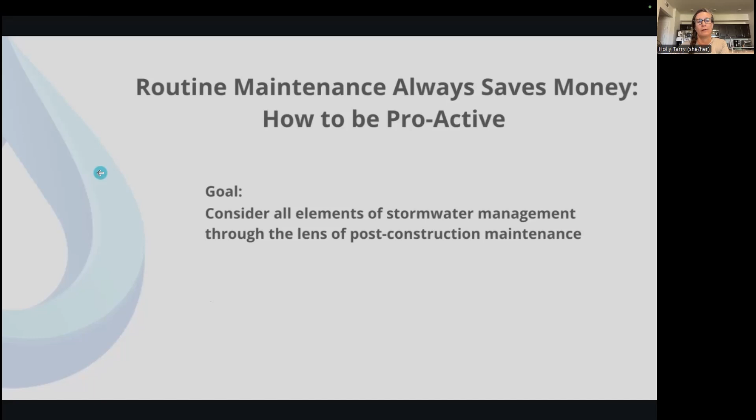I don't know why it's going backwards instead of forwards. There we go. Throughout the presentation, the agenda will be at the bottom as a progress bar. And we'll start with our condition score criteria as a way of framing the whole conversation and speaking the same language.

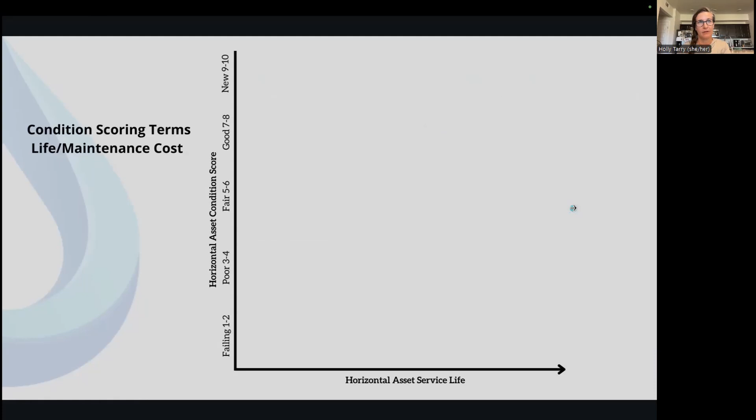Horizontal assets like pavements, ponds, and pipes that serve a property can be assigned a condition score at any point in its lifespan, and each asset has a service life. And left alone, each asset's condition will degrade over time. When the asset is new, the operator can make a decision to invest in routine inspection and maintenance as the most cost-effective way to keep assets functional and compliant. These systems have water quality functions, and municipal enforcers will be by at some point to inspect them.

Over time, the asset condition bumps over a threshold where it cannot be made functional and compliant with routine maintenance and needs more complex, more expensive restorative maintenance. You can delay the need for restoration with routine maintenance. And then failing to make restorative repairs or failing to make them in time bumps the asset condition over a threshold where it can't be restored and needs to be reconstructed to function. And this costs up to 10 times more than maintaining the asset.

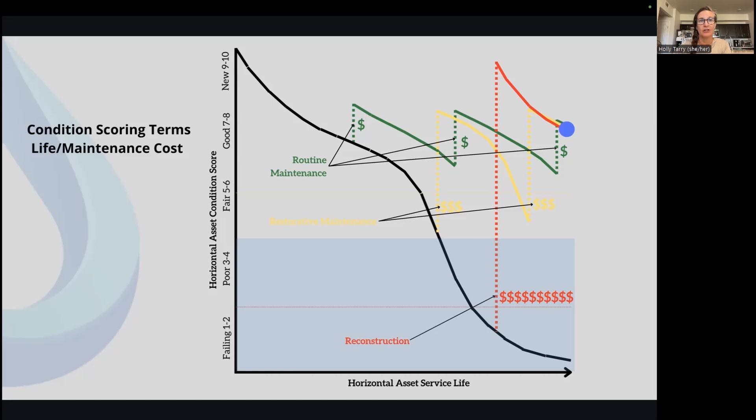And it puts you right back at a new opportunity to maintain it routinely, or try again to dodge municipal enforcers and let it fail and rebuild. And then, of course, these poor conditions degrade the user experience, lower the property value, and just keep putting Class A property standards farther and farther out of reach.

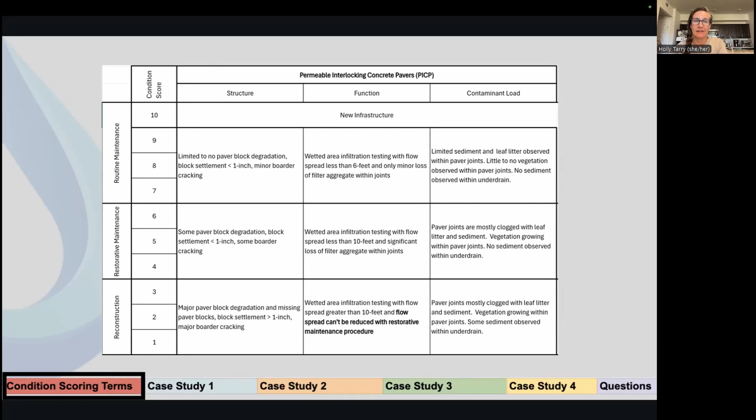I know you can't read this, but we'll talk about how you can get your hands on it. Our engineer has developed condition score criteria for various types of SCMs, structure, function, and contaminant load, to frame the maintenance needs of the assets. The condition score criteria is actually something we love to share and get feedback on. It always makes for interesting conversation about different ways that people are organizing this complicated information. So please reach out if you want to see the whole thing. We have criteria for PICPs, EDBs, bioretention, storm sewer, and underground SCM.

The condition scores overlap with our framing of maintenance costs. So we can speak to the operator's concern, which is cost, but also the enforcer's concern, which is structure, function, and contaminant load of the SCM. And we talk about the levels of service consistently to reduce confusion.

Routine maintenance when the asset is newer or restored and in good condition and compliant with municipal code and least expensive to maintain. Restorative maintenance when the asset is not compliant with municipal code and needs more extensive, more expensive service to bring it into compliance. And reconstruction when restoration can't bring the asset into compliance and you'd just be throwing your money away to keep trying.

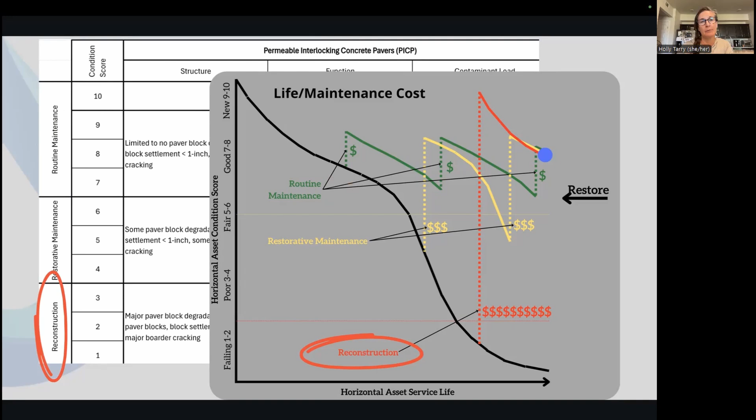So for this first case study, we're looking at permeable interlocking concrete pavers and comparing two client profiles. Here's the timeline. Both are notified by municipal enforcers that their pavers are non-compliant. They both get restoration service. We'll talk about what that entails.

Client A pavers are then compliant and they have a chance to get on a routine maintenance schedule and stay compliant. But client B pavers still fail the infiltration test, which we'll talk about too, and need to be reconstructed. They're too far gone.

So client A initially failed the test and was not compliant, but was not far off. The pavers weren't in horrible condition. They were more newly in need of restoration. And after restoration, the asset was in great shape, passed the test easily, and can be kept compliant with the least expensive service, routine maintenance.

Client B, on the other hand, failed the test badly. The pavers were in bad shape from years of deferred maintenance. The client had to try restoration, and it did improve the condition, but that 5-figure expense ended up being a waste for them because we couldn't bring the pavers back, and we'll dig into why.

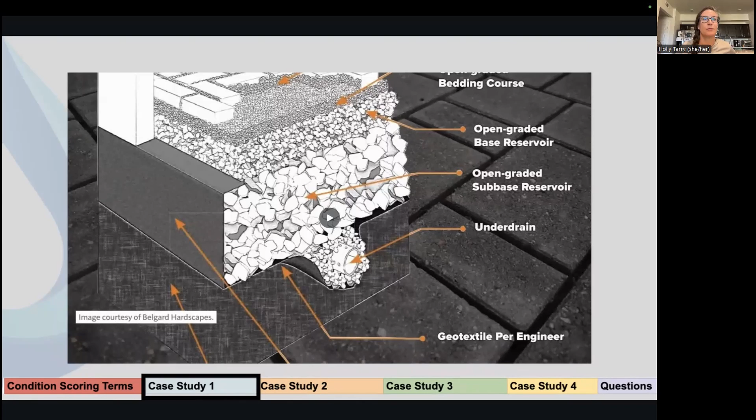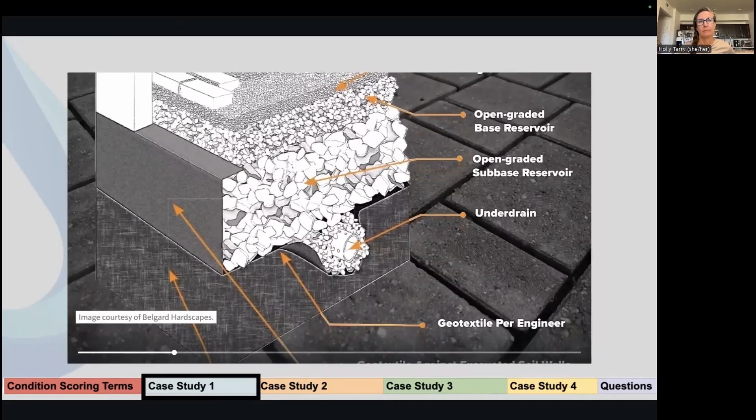To understand the levels of maintenance, let's look at the paver system itself and the gallon pour test, which informs the condition score. Permeable paving allows water to pass through into the gravel layers. It uses unique products with grids or patterns filled with gravel or grass. These robust and durable products can withstand heavy loads and traffic while also maintaining permeability.

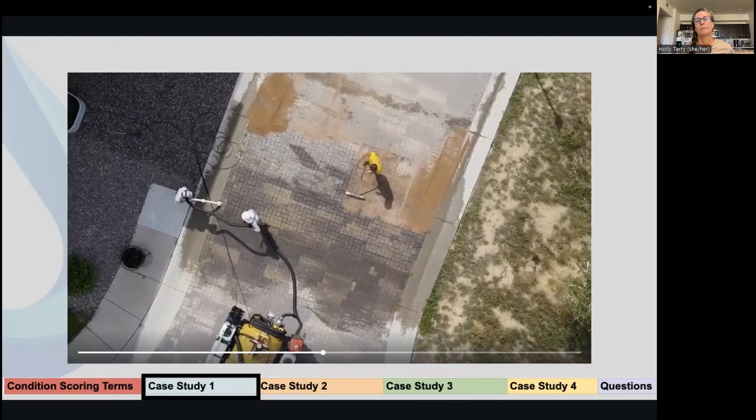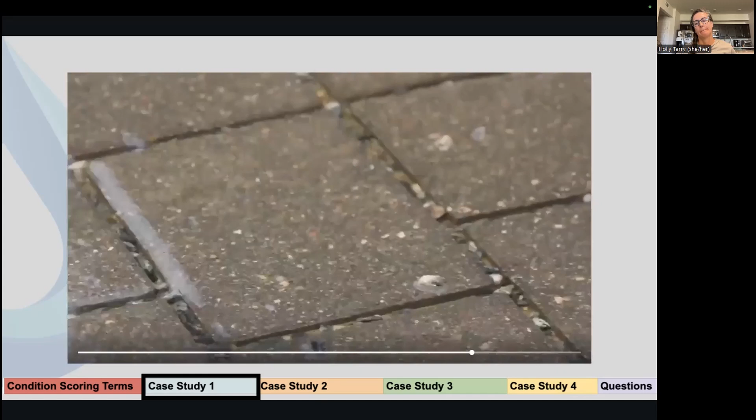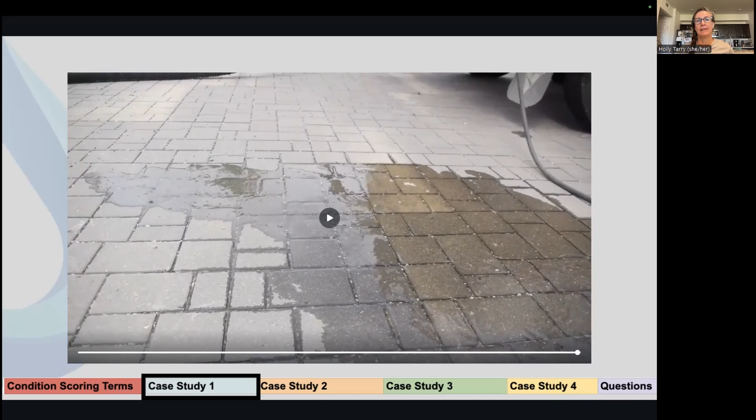A simple test for the functionality of the paver system is to pour a gallon of water over the surface at an even rate. The distance the gallon of water travels directly reflects how well the paver system is capturing water as opposed to letting the water run off. The infiltration test is from the Colorado Stormwater Center Permanent Water Quality BMP Inspection and Maintenance Field Guide.

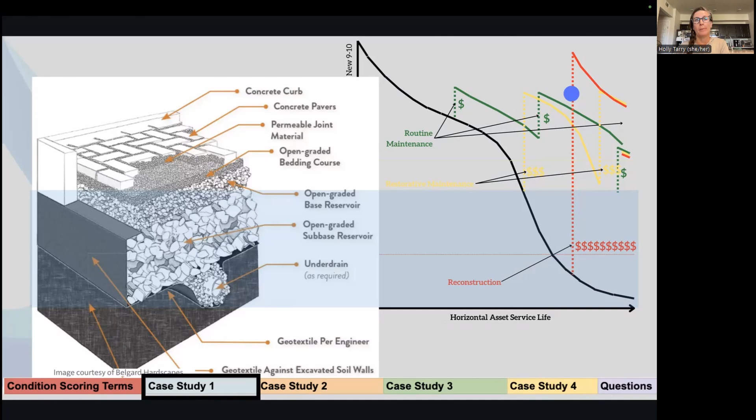Now, all of the maintenance that we can really do is at the top brick layer. We can remove materials off the top of the joint rock between the bricks, which is routine maintenance, or we can completely remove the joint material by vacuum removal and replace it with clean rock. Everything below that, in cases where the sediment and grime has worked its way through lack of maintenance down into layers below the brick, is a reconstruction situation. Once you're pulling up brick, you're in the very expensive reconstruction zone.

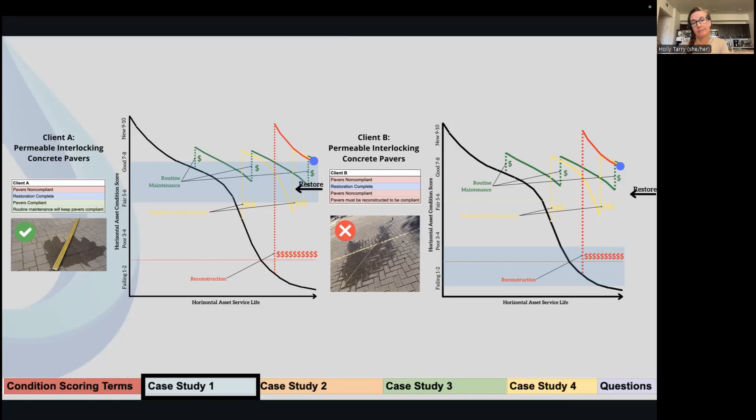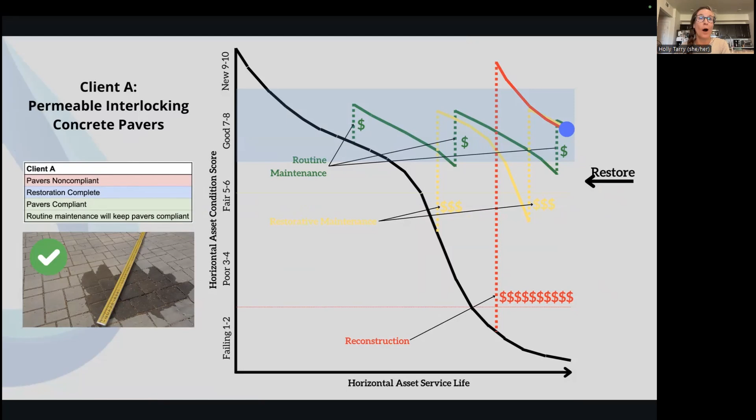So the very different outcomes in the two cases were due to the starting condition and the amount of time the asset was in use without maintenance. With the better beginning condition score, we could do the restoration and improve the condition into a zone where all that was needed to keep it going for a while is routine maintenance. And this is what that looks like. Lawn and litter vacuum with 1700 CFM suction.

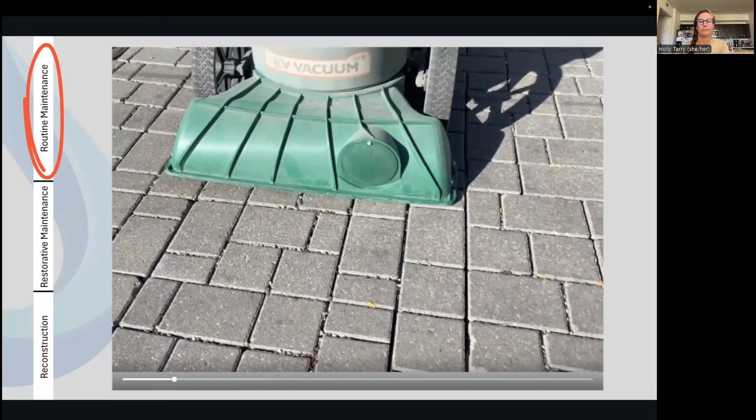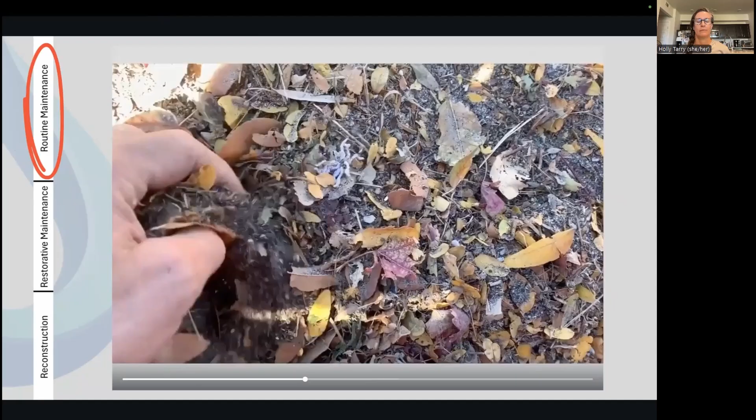This removes grime and debris off the top of the rocks without removing the rocks themselves. Removing sand, dirt, leaf litter and the grime that sticks to it allows the system to function properly for longer. Clean joints mean grime is not working its way deeper into the system. How often this type of maintenance is needed is site dependent. We recommend starting with twice per year and adjusting based on inspection results.

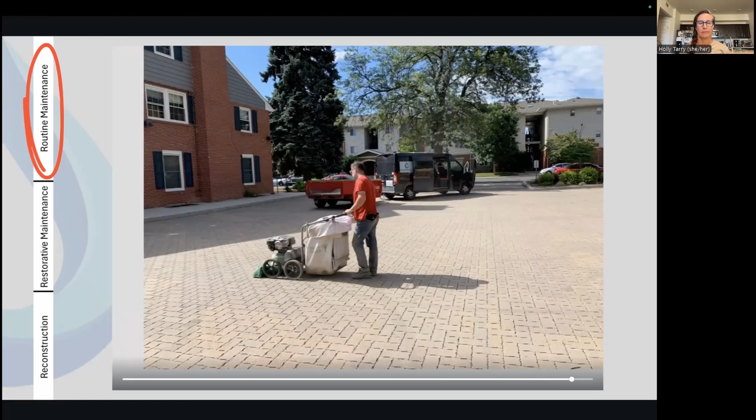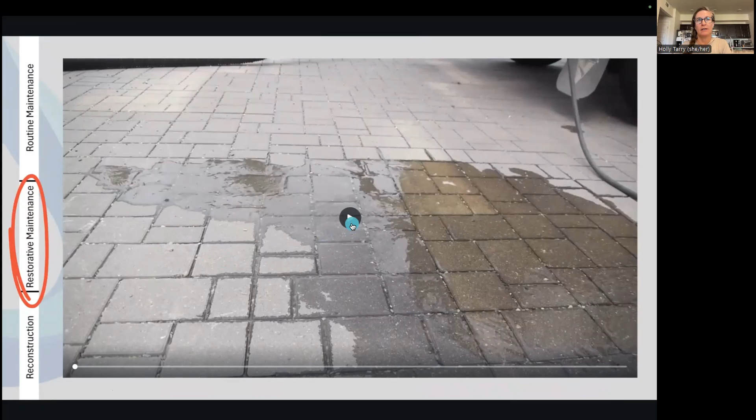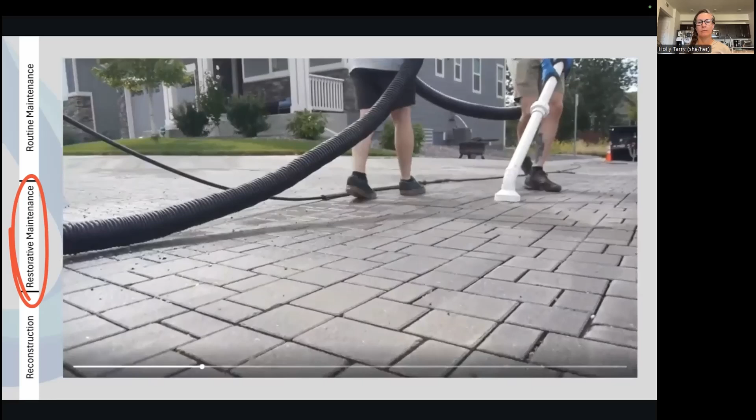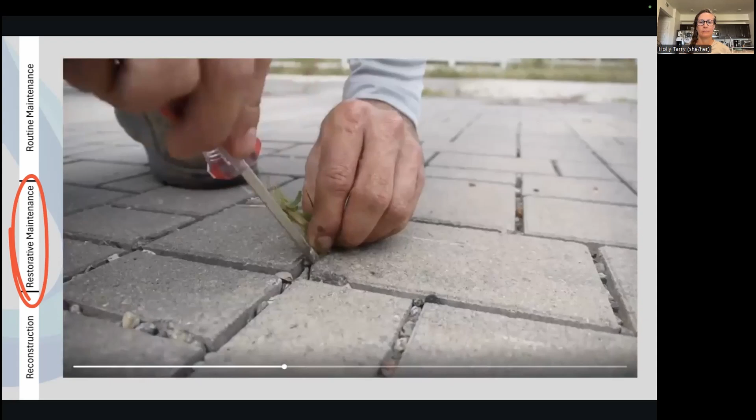Now let's look at what restoration when the asset is not compliant looks like. In the Cabot Court case, the water was running 12 feet downslope before maintenance had begun. To update the paver system, first SRS removed all the old gravel using a high-powered vacuum system. Water is used to break up the sediment to allow the soiled aggregate to be removed with the vacuum. Any small weeds or grass are also removed to allow fresh gravel to be inserted.

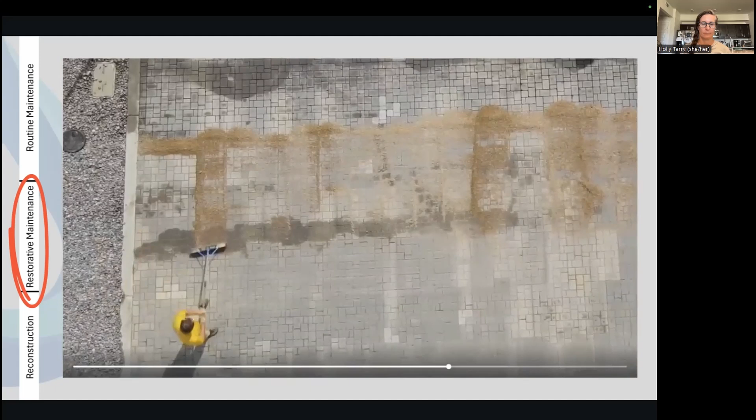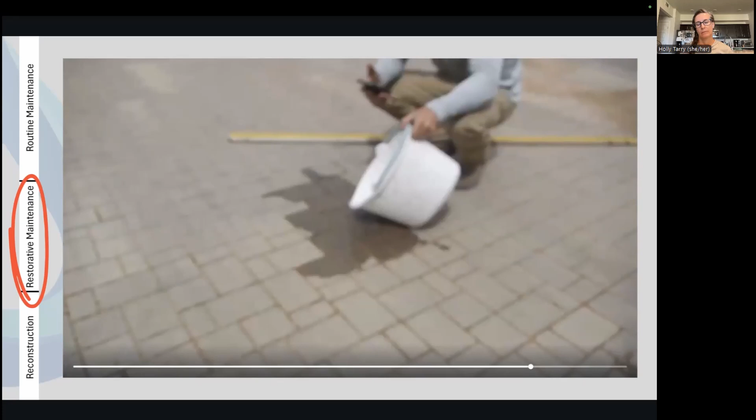Finally, the paver blocks are refreshed with new gravel, specifically washed number 89 aggregate. The new gravel is carefully swept into all the gaps between the paver blocks at an even and consistent fill. Once maintenance is complete, the permeable pavers are tested again to check how far the water spreads. After maintenance, the paver system at Cabot Court had improved to a spread measurement of less than 2 feet, an 84% improvement in function compared to before maintenance was done.

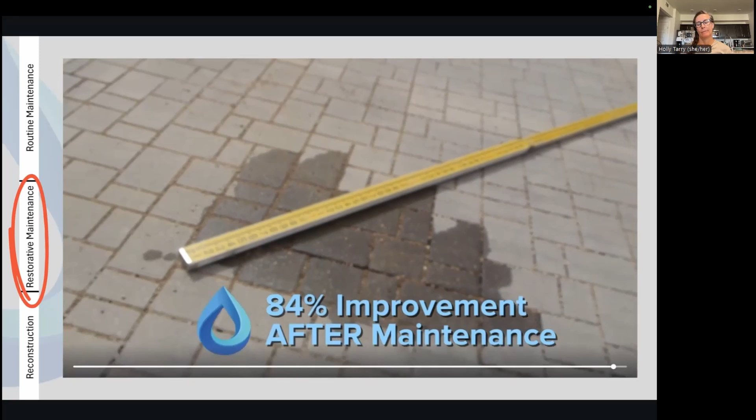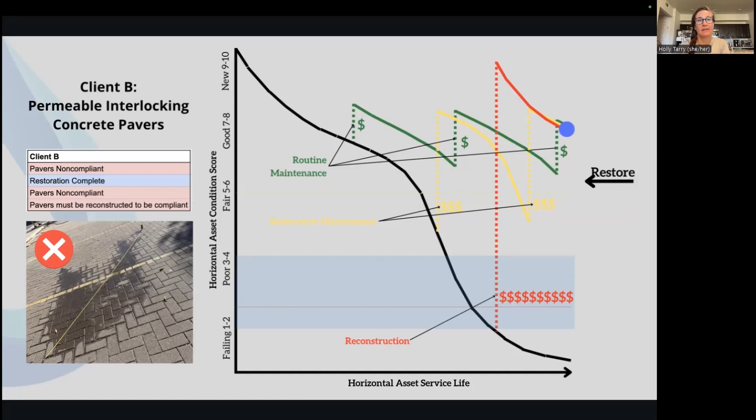So in the client B scenario, after they had attempted to restore, which improved the condition but nowhere near enough to bring it into compliance, they're left with no choice but to reconstruct the pavers. This kind of too-late-to-do-anything zone is where the real expense comes in.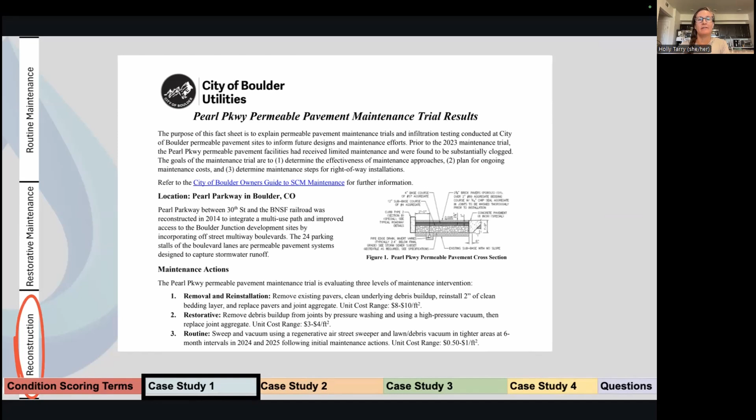The city of Boulder, Colorado has researched maintenance outcomes and costs on their own pavers and published Pearl Parkway permeable pavement maintenance trial results, which cites routine maintenance at 50 cents to $1 per square foot, restoration at a cost of $3 to $4 per square foot, and I'll say we've seen this service below $1 a square foot, and reconstruction at $8 to $10 per square foot.

So these two paver clients are on very different timelines and putting out very different expenditures. Client A caught the need for maintenance early. The enforcer actually caught it, but the client took action to quickly restore it, and they'll be compliant and in that routine maintenance zone for potentially years before needing restoration again.

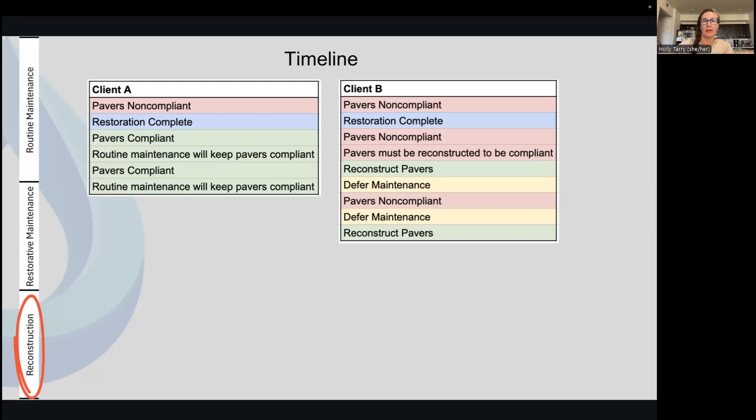While client B wasted money on the restoration attempt, although you couldn't blame them for trying, because the alternative is to rebuild, and then what? Back to deferring maintenance and dodging enforcers until the asset fails again, or starting the routine maintenance, the very expense they were trying to avoid, right after completing the big construction project of rebuilding the whole thing.

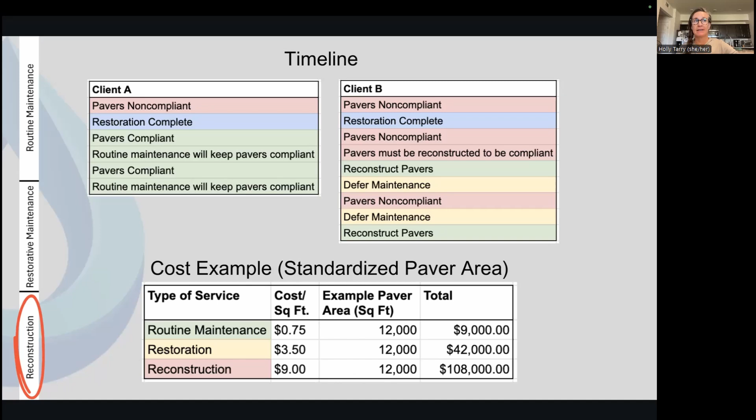And the cost of the different timelines is so different. If we use an example site, since the two real sites are different sizes, and apply Boulder's numbers, the costs of these service levels are drastically different. So that's the end of the paver case study. Next up is detention pond.

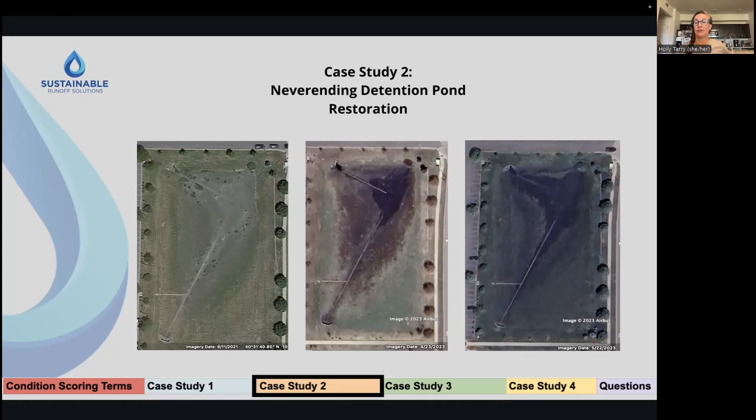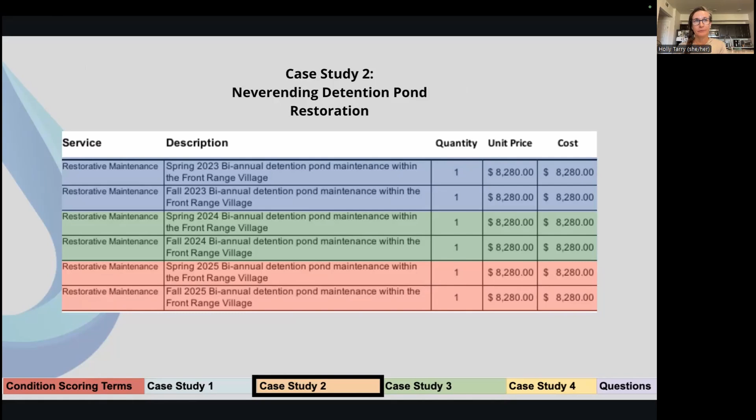Okay. So this next case study is about an extended detention basin perpetually living in that restoration zone due to it being under-designed for the conditions. The pond was needing restoration 2 times per year. They were spending nearly $17,000 a year trying to occasionally be compliant, but really were always remaining behind the 8 ball. And because the amount of material entering the pond was sometimes keeping pace with the amount we could remove during restoration, the pond was never cleared.

The best we could do within their budget was to just keep it from getting worse and let them know in the quote that it was likely that the existing sediment within the pond would resuspend each year, causing clogging issues until and if restoration was complete.

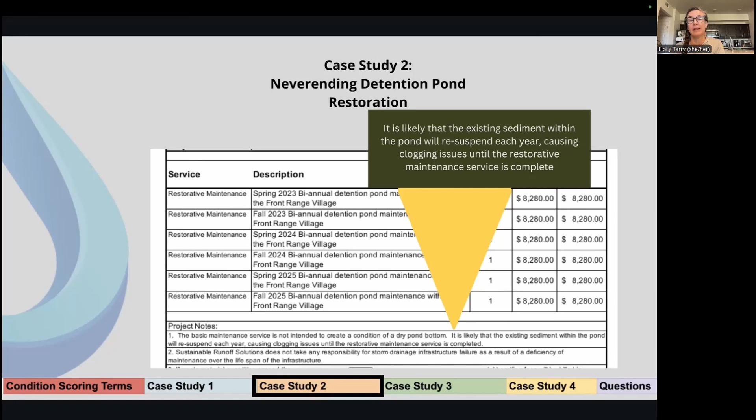Now let's look at 3 snapshots in time and how it became clear to us that at this rate, restoration would never be complete. Let's look at 3 aerials of the Ziegler Pond from Google Earth. One from June of '21, right before our first cleanout. One from April of this year after 3 cleanouts, right before our 4th. And one from just a month later, right after our 4th cleanout in a super wet year.

The sediment is drier and lighter in the first picture, but you can still see that it fills the channel all the way back to the northwest inflow location of the Ziegler Pond, and the long center channel is full or patchy at best for the full length. Fast forward 2 years and 3 cleanings, and the channels are definitely more clear, but just 2 weeks after a cleaning on a very wet year, the channels are filling back up.

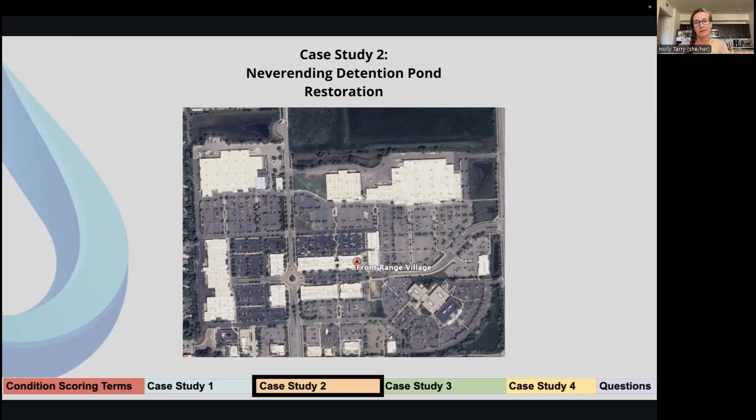Our engineer determined the amount of sediment coming into the ponds off the more than 2 million square feet of pavement on the property was overwhelming a few design and installation flaws on the system. We came to realize the pond would never be able to manage the load without permanent improvements. Now, the reason investing in the improvements and finally achieving full restoration might matter to a client is that it could lower the long-term maintenance expense to be doing routine maintenance on a finally fully functional system.

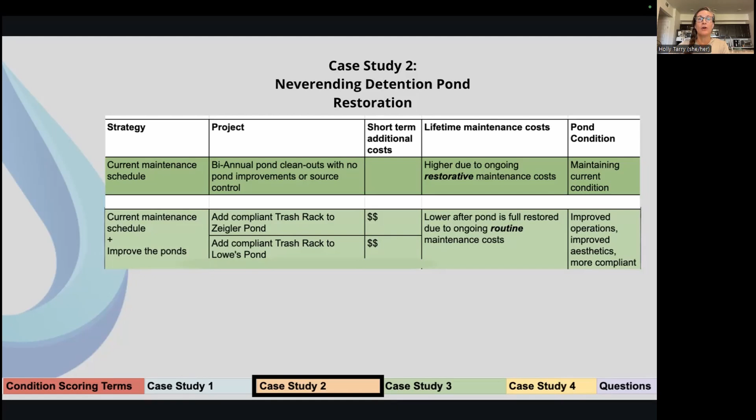So we really had 3 options. First, we could stay the course and probably expect ongoing restorative maintenance costs to be a permanent line item in the budget and likely manage some occasional violations from the city. Or reach full restoration of the pond and potentially lower the cost of the maintenance in the long run, which we thought would require pond improvements and a source control audit. So let's look at those 2 options.

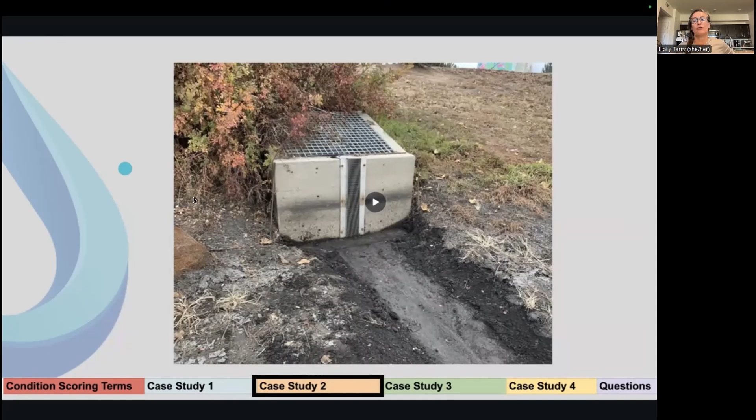Here's what we envisioned for the pond improvements. As it is, the outlet structures were not constructed with trash racks in front of the well screen, like this one, for example. So the well screen is constantly clogging and requiring chicken wire workarounds.

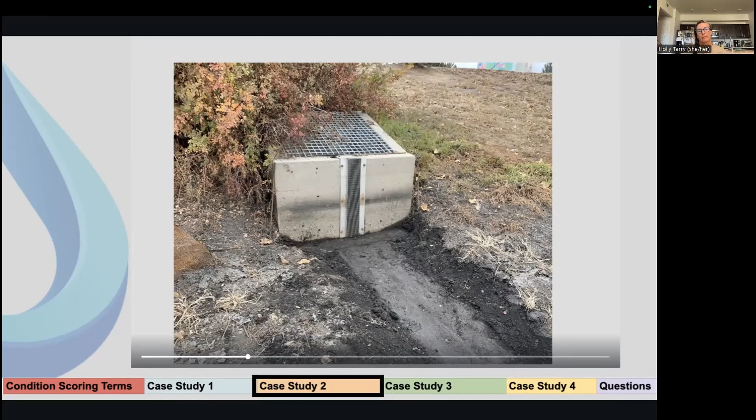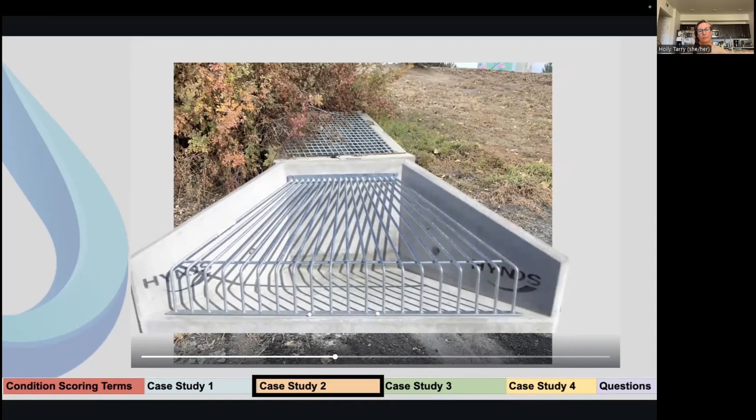Retrofitting the outlet structure with wing walls and a trash rack would meet design standards and improve operations of the pond. This is the most simple, cost-effective, but still compliant design that would improve operations of the pond. Additionally, 2 of the Zeigler Pond inflow locations see significant amounts of sediment, and adding forebays would improve operations and make the system easier to clean.

Forebays slow down the water as it enters, allowing the sediment to fall out in a consolidated, easy to maintain location, and release the water slowly down toward the outlet, arriving much cleaner and less likely to fill the trickle channel and clog the outlet structure.

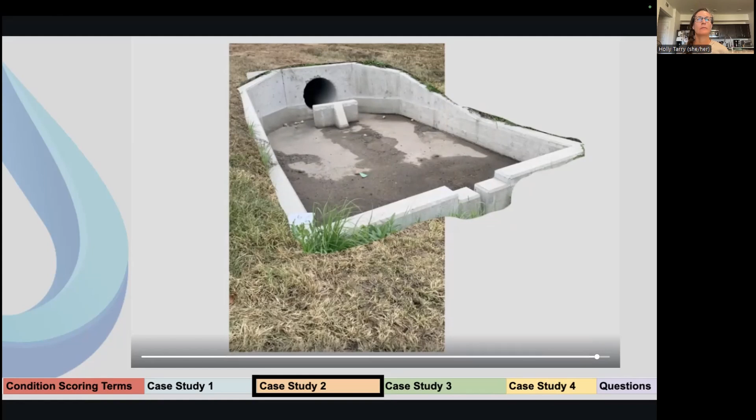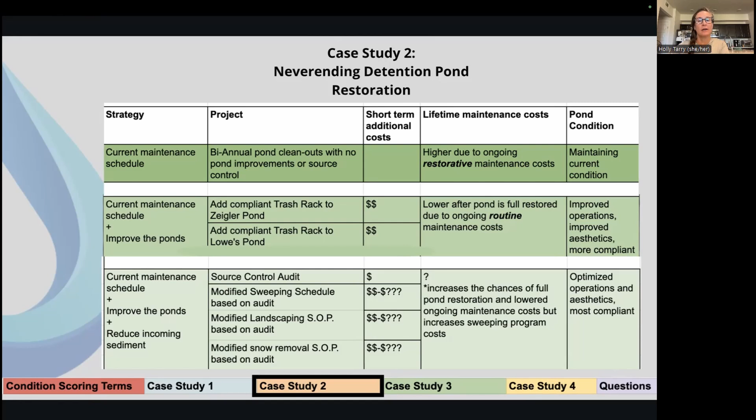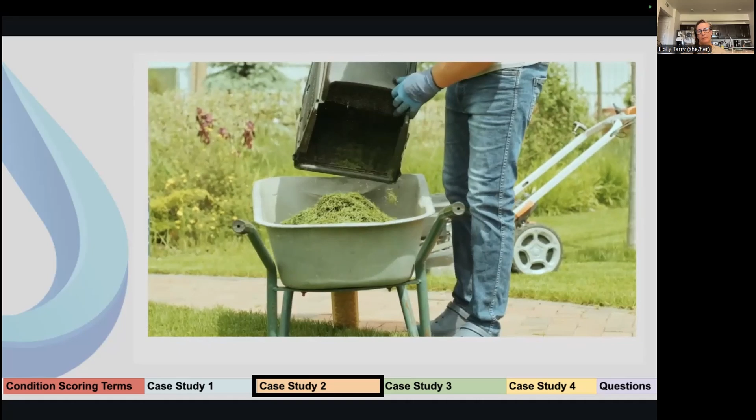And since we thought the amount of sediment coming into the ponds may still exceed what the pond can handle, even with the improvements, we argued that they could prevent some of the sediment from entering the ponds in the first place with a source control audit and a few strategic tweaks to contracts they were already managing. The audit would identify parking lot sweeping, snow removal, and landscaping adjustments that would avoid costly mistakes and optimize the impact those services have on your storm drainage system.

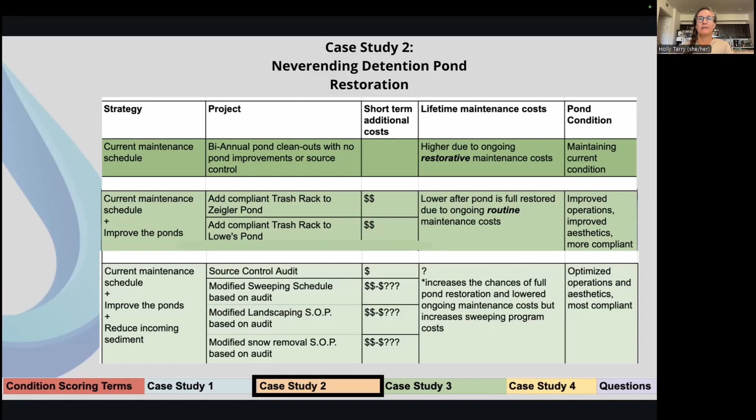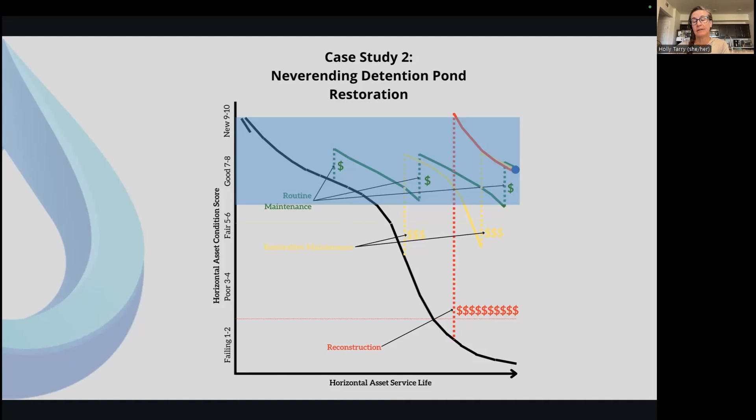Laying out these options and offering a stack of services allowed us to work within their budget while continuing to keep inching the property into that routine maintenance zone so they could spend less per service. So that is the end of the detention pond case study.

Is there anything we should discuss from the chat, Jason? Or if you have a question, you can unmute and... Holly, I have a question. This is John Tarascus. Your source study, what were you identifying as the main source of sediment?

We identified a couple of different sources. One was the sweeping operations were not done correctly. They weren't being managed correctly, and a lot of the sweeping material ended up in the storm sewer because of the specific contractor's process.

So that was one. Another one was landscaping and how they were managing the turf and other vegetation around these ponds, whether or not they're just cutting it, leaving it in the area, or cutting it and collecting it, things like that, where they were storing their ice melt material, where they were storing snow piles, and how to manage those things. All those things kind of added identified benefits on how we could reduce the sediment in the system.

And I would say there'd be an additional benefit. If you're getting that much erosion from your landscaping, that's going to be another maintenance item of a different nature, replenishing the topsoil you're losing. Well, and grass clippings. Yeah. There's a grass clippings in the pond situation.

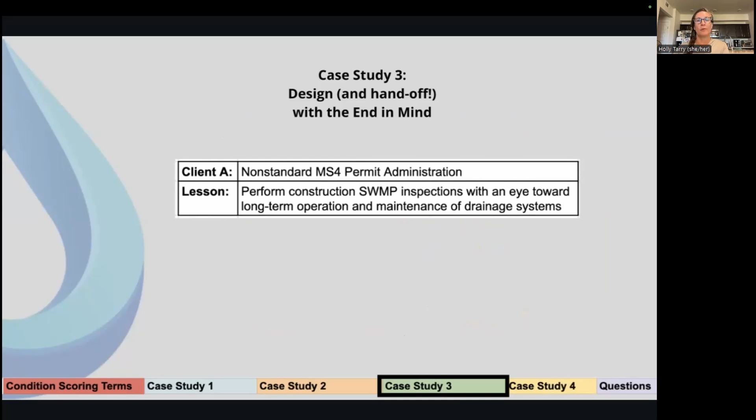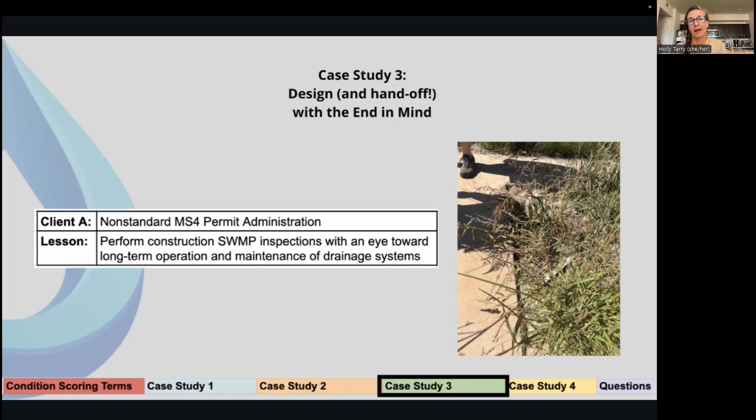The first profile is a non-standard MS4 client, in the context of construction SWMP inspection with an eye toward long-term operation and maintenance of the drainage system. Jason identified a drop from the concrete pan of a detention pond to the adjacent grade, preventing runoff from getting into the pan, where it would be most easily removed, and a conveyance channel missing surface treatment altogether, making sediment removal really difficult.

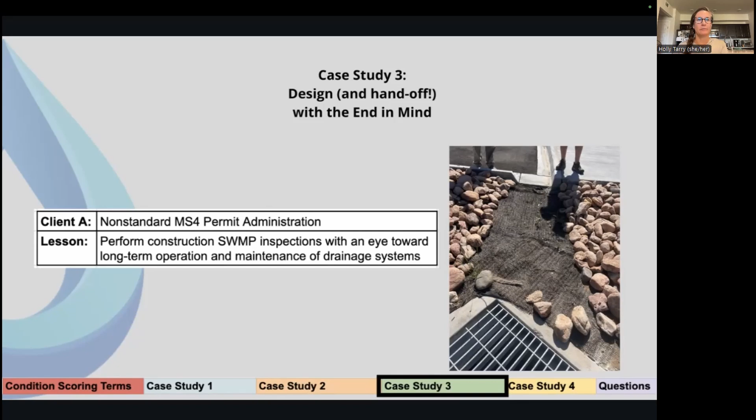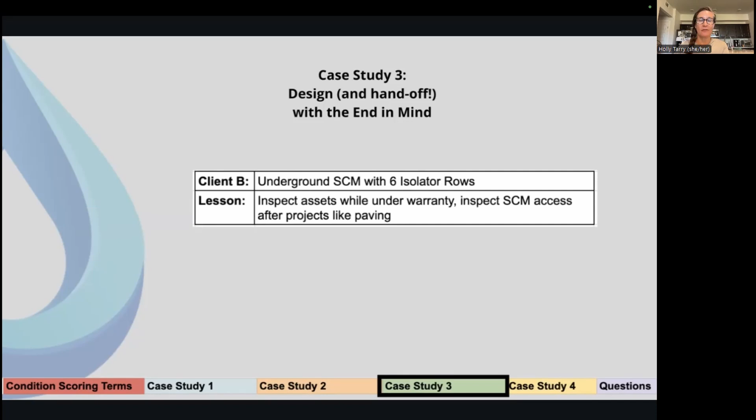This next client profile has underground SCM with 6 isolator rows. In this case, the operators of the property got good information about their assets at handoff and called us in early to understand their system's maintenance needs. They were smart to learn about their asset because it's so valuable at that brand new end of the condition scale, giving them an opportunity to do a lot of prevention. We recommended an inspection of all the rows right off the bat, well before they were expected to need maintenance, while the system was under warranty, to check for access problems.

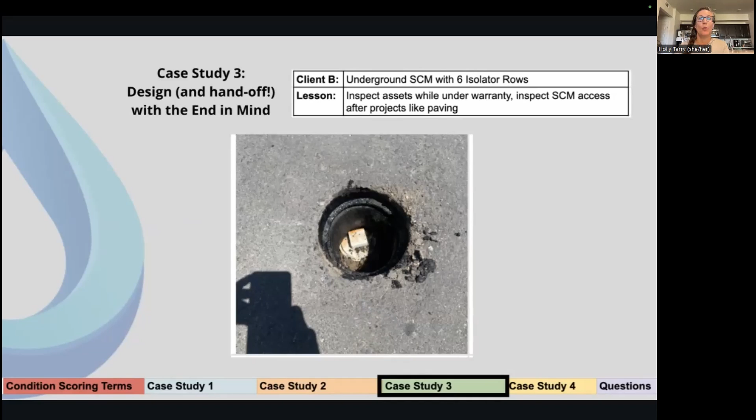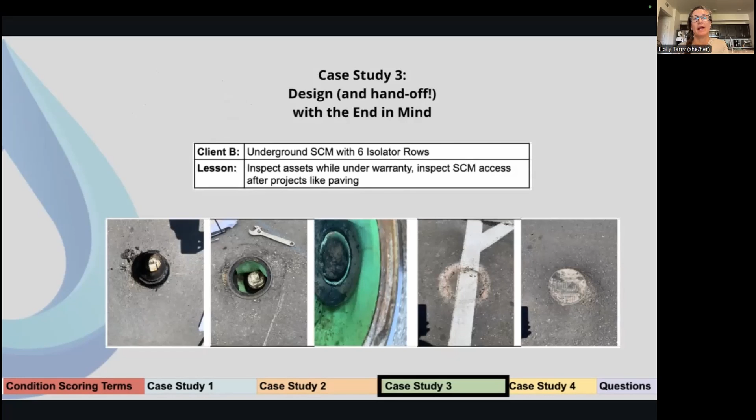In that initial inspection, we found that 5 of the 6 inspection ports were inaccessible: 1 with the valve box blocking access to the port, 1 with crushed housing preventing access to the port lid, 1 with the port filled with mud, 1 with the housing lid painted over prohibiting access to the fasteners, and 1 with the housing lid asphalted over. Because of those early inspections, the client got the information they needed to have their pavement contractor correct all of those problems.

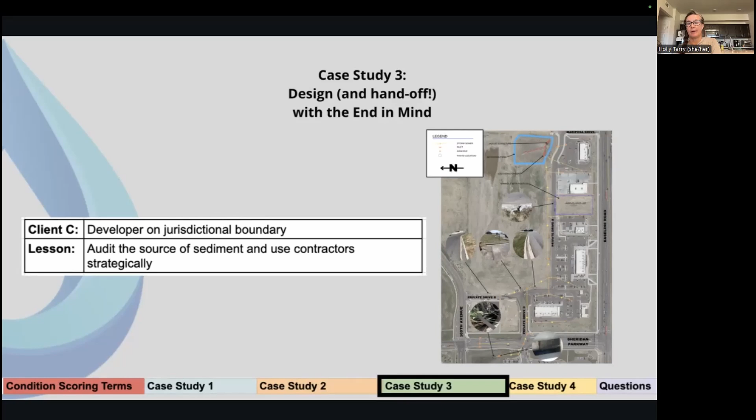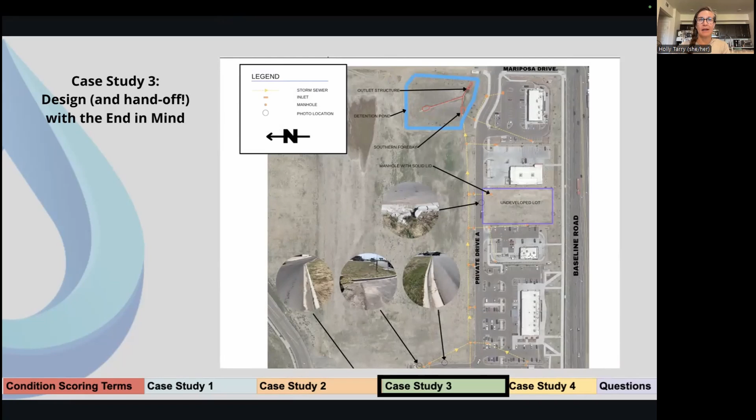The client's detention pond is here in blue. One source of sediment is from the undeveloped lot located along Private Drive A. The lot is generally sloped from south to north with no obvious drainage path. The section of the curb right here is broken, allowing runoff to enter the drive and drain across the street to an inlet.

A storm sewer pipe was stubbed into the lot and terminated at a manhole with a solid lid that prevents water from entering the storm sewer. This is the manhole with the solid lid and the stubbed in storm sewer, so there was no way for water to get in here. The broken curb was the only path for runoff to exit the lot, and since it isn't draining as designed, it's carrying sand and sediment from the lot to the storm sewer, ending up in the southern forebay of the client's pond.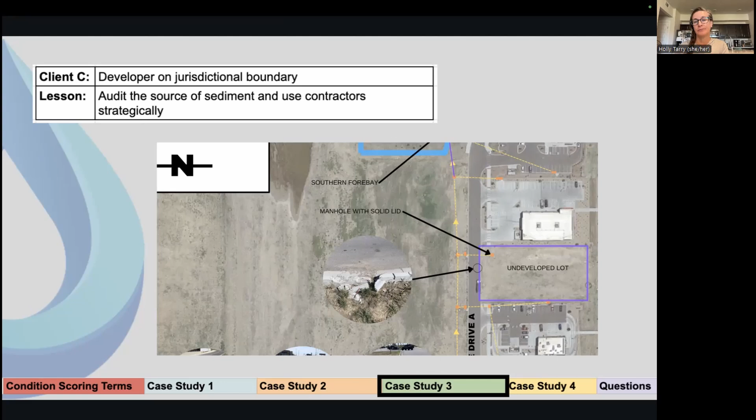Another source of sediment was from the King Soopers detention pond across a major parkway. The inflow pipe into the water quality chamber of the outlet structure on the pond was mostly blocked, and the well screen protecting the water quality plate was clogged. The pond discharges under the parkway and into the storm sewer, contributing to the client's pond, and it's in another jurisdiction. We worked with the neighboring jurisdiction to get that resolved, but that required us knowing in the first place and understanding the source of the sediment coming into the client's pond.

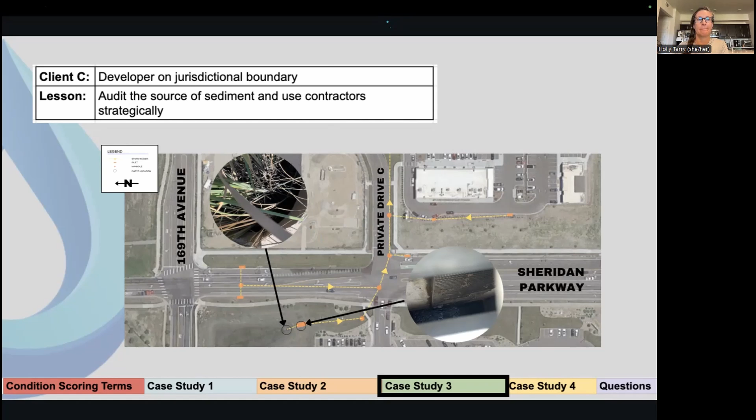This audit helped serve the client's goal of minimizing two things: expensive restoration and notices of deficiency from the city, by preventing problems from coming onto the site wherever we could. So that case study is about designing and considering stormwater operations with every project and inspecting quickly.

Anything in the chat to discuss, Jason, or does anybody have a question they want to unmute and pose? No, I don't see any chats or questions in the chat. Okay. Interrupt me if you have a question. I'll keep moving in the meantime.

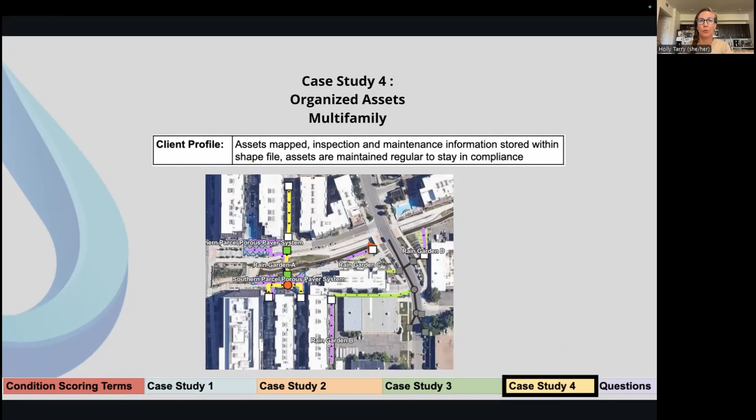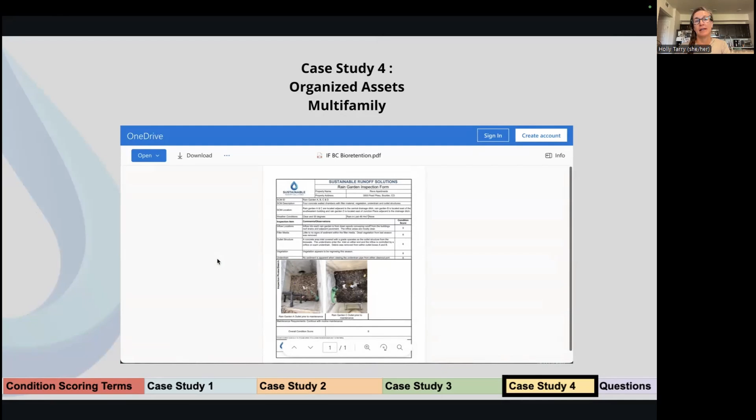In this last case study, the client has their horizontal assets, those pavements, ponds, and pipes outside the building, mapped. They have inspection and maintenance information associated with the shape files in the map, so they can easily access information for municipal inspectors, and their assets are maintained regularly to keep them in compliance. They're really investing in staying in that routine maintenance zone to reduce their expenses and long-term costs.

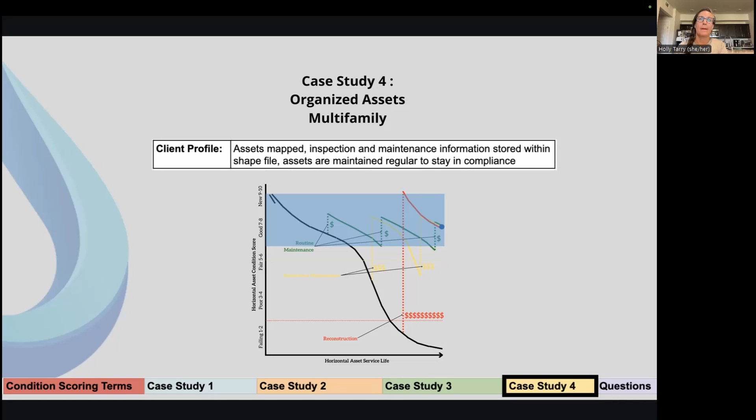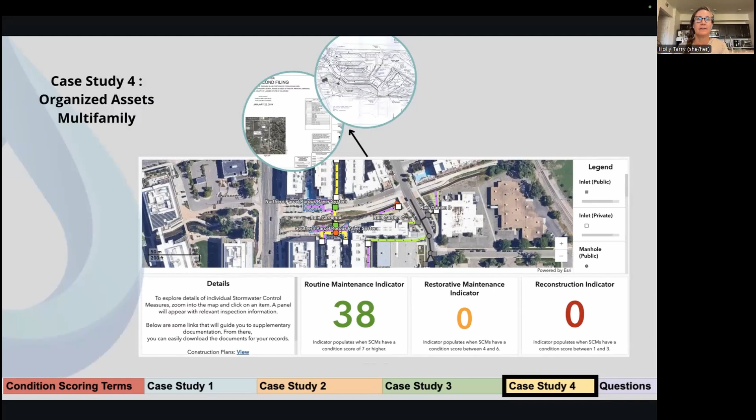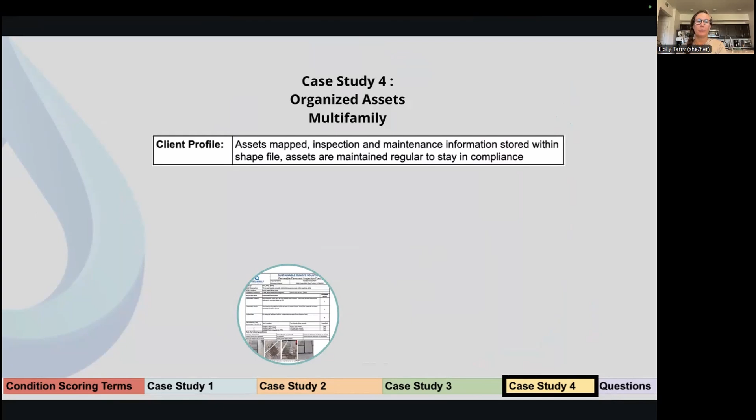They are invested in the time and money saving practice of organizing information about their assets. They have easy access to utility plans and drainage plans, standard operating procedures from the development agreement, site photos, and reports from biannual maintenance. The biannual maintenance reports include functionality testing results, observations, photos, and that important condition score.

The condition scores for each of the site's assets are compiled into maintenance indicators on the site dashboard. Maintenance indicators allow for an understanding of which assets need restoration for budgeting and planning purposes.

Here's a quick video we use to train clients on how to use the dashboard and the information in it to budget, save time, and prioritize the work.

Accessing your site dashboard is as easy as clicking a link and viewing records for each individual inspection or maintenance visit on your site. Clicking on a record will open a dashboard for that record.

You'll see a map of your site with the stormwater infrastructure indicated and a legend on the right.

You'll find easy access to relevant resources, like a link to your development agreement with the city, which spells out your responsibility for the stormwater infrastructure on your site, and construction plans, which offer specifics about how the infrastructure is meant to function. You can toggle back to the previous record and forward to the next.

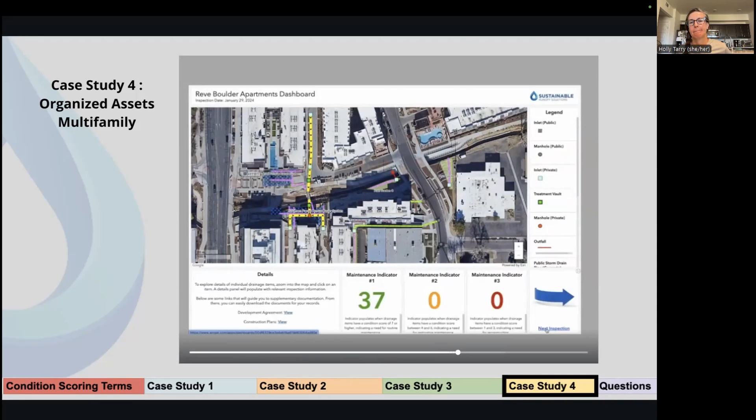When it's time to budget, you can easily see which assets fall below your routine maintenance level and need to be restored. Restoring infrastructure, while it still can be restored, keeps it out of this red zone where the system can't be restored and needs to be completely reconstructed.

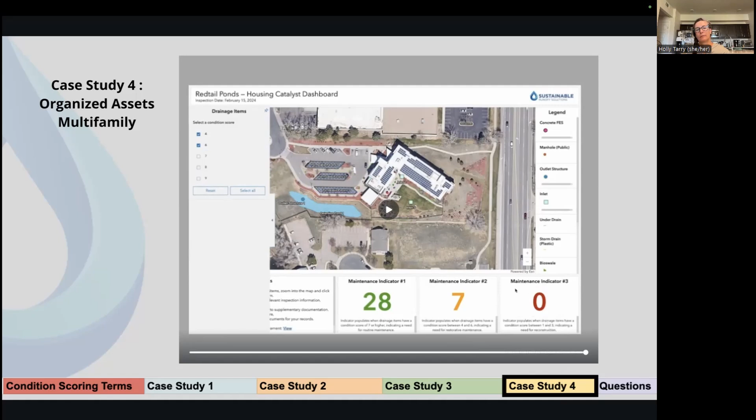We would love to be in touch, especially around the language that people are using to educate clients, but also have it make sense with the enforcers. That's been really educational for us to see how other people are talking about this stuff. And we have plenty of time for questions if there are any.

John's question regarding whether we find that the owners of these assets, especially low impact development assets, are well informed by the original design team for the required maintenance and life expectancy. And the answer is no. We're seeing a huge disconnect from the time where the developer is involved with the property, going through entitlements and design and even through construction, to when the developer hands over the property to the end user, whether it be the owner, the association, the management company, whatever it is. That is a huge disconnect.

When we talk to municipalities and we talk to clients, we just see that there's a lack of information being passed at that point, and that is really critical because that includes all of your budgeting and all your understanding of what you're required to do going forward.

What's been your experience with tracking down the performance of your low impact development or your green infrastructure out there? How do you know you even have an issue? And do you want to commiserate on, is this an unfunded mandate? By the way, who gave us this responsibility to go out and inspect these? We hear a lot of that. It's like the cities, municipalities have very little resources to spend, and this is just one more thing they got to do.

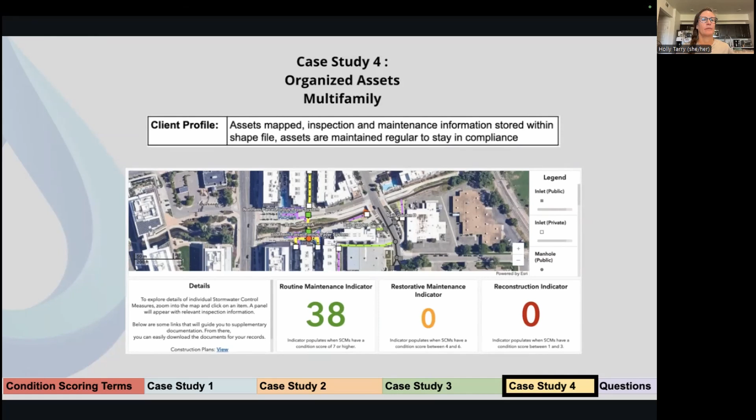Now, you're in Colorado. What geographic areas do you actually service? We have clients, mostly Front Range of Colorado clients, all the way down south as far as Parker, which is south of Denver. Fort Collins is about 60 minutes north of Denver, and that's about as far north as we have clients. A lot of the municipalities along the Front Range are passing the LID municipal code, or have had it passed for several years, and are at a place where the assets are starting to need maintenance.